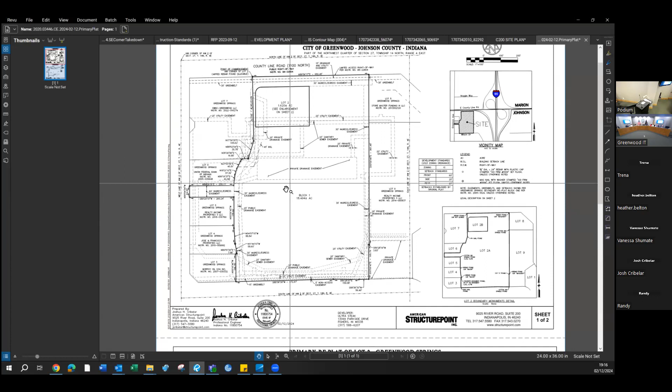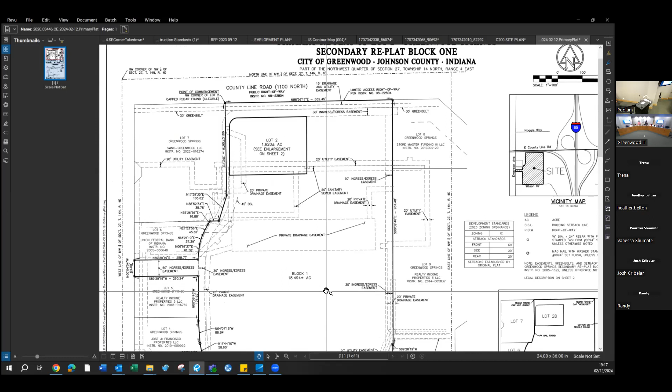On the screen in front of you, we have a primary plat to create a lot within the Walmart parking lot to allow us to construct a restaurant. Last minute, Walmart did approve us to act on one of Gabe's comments to allow the Walmart parking lot to become Block 1 and the lot we're carving out to be Lot 2, which will enable Walmart, if they so choose, to create another outlot or further subdivide their property without coming back for the primary plat process. We are creating this 1.62 acre lot for a restaurant that will have access from the ingress and egress easement, as well as Walmart's parking lot here on the southwest corner.

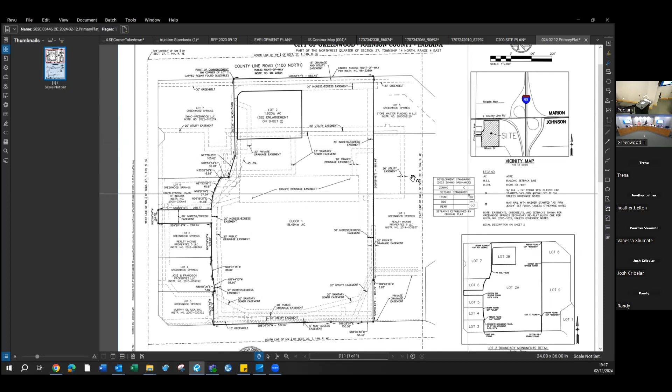Gabe, would you like me to cover the waivers now or keep that separate from here? Let's keep that separate for now and focus on the primary replat. Okay. This is zoned IC. We are meeting the ordinance for IC besides the waivers we will be seeking in the next component. This is a more zoomed in version of the primary plat just on our 1.62 acre lot that we're proposing to establish. And that's pretty much it on that.

Mr. President, is it appropriate for me to ask a question at this point? Please do. Josh, I appreciate you working with Walmart to get the approval to have a block so it can be divided into future lots and go through the replat process. Does Walmart have a number of lots they would like to divide Block 1 into, or have the option to divide Block 1 into? Currently, their intent is to never further subdivide.

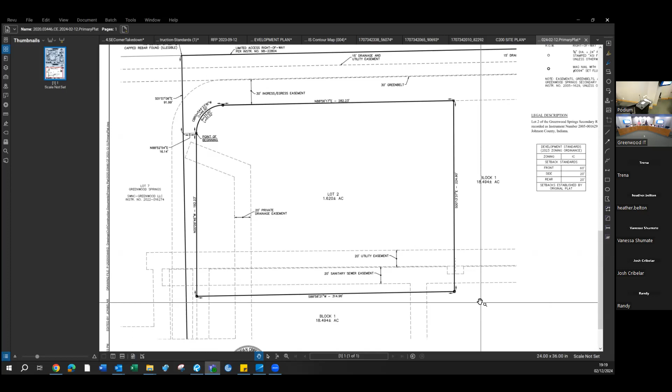I think per the current plat, they could subdivide up to 6 more lots. I don't think that will ever get to that point. I can't imagine they'd subdivide to be more than 1 or 2 more lots, just based on the frontage and size of the lot that we're contemplating currently.

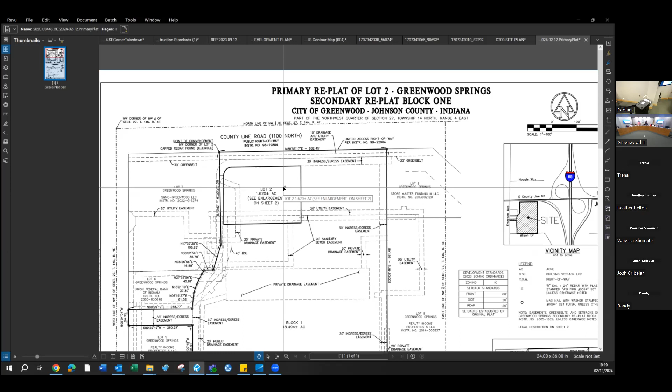Thank you, and Josh, it came in late. Do they have noted on here the number of lots that the block is allowed to be divided into? We did not add a note such as that, but that is certainly something we could add to the secondary plat document to ensure no more. I think in total there can't be more than 15 lots in this subdivision, so we can make that note. Okay, if this is approved, I would recommend that be a condition for the secondary plat. That seems agreeable.

Mr. Cribelar, is there anything else? There's nothing else on this item. Okay, then I move forward and ask if there are any remonstrators who would like to come forward and speak. Seeing none, close public hearing.

Commissioners, questions, comments? I'm curious about the increase, the traffic over there is already pretty intense, with the 3 traffic lights in a row. It's very intense. That's my Walmart, right? So what's been addressed, Gabe, with regard to all the traffic, adding more business and adding more parking?

The Walmart parking lot that exists right now is currently very overparked. They are far exceeding the number of parking spaces required. We're also working with Josh and his team to establish their own parking areas. As I understand it, Walmart will not do a formal parking agreement with them, but will allow people to park in Walmart's lot who want to go to the restaurant. So as far as the parking question, that has been looked at by staff, and we are still going to be overparked in the Walmart parking lot. As far as traffic concerns, we are working with our engineering team and with Josh to figure out the best way to design the drive aisles, and one of those will actually come up during his waiver request. We are also looking at the access points, making sure we're not creating a dangerous access on a corner or spacing those out appropriately.

It would apply to the parking as well. I think most of the traffic issues are southbound traffic trying to enter that complex, which tends to back up to County Line Road. The northbound has two options: they can come in the southern entrance, where the first southernmost stoplight is, or they can come in the second one. That doesn't seem to back up as much as the southbound traffic does.

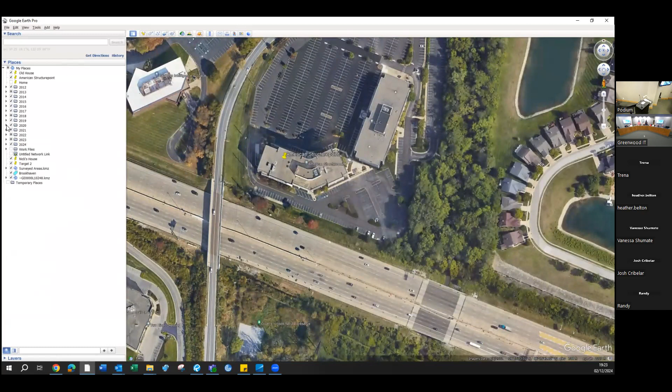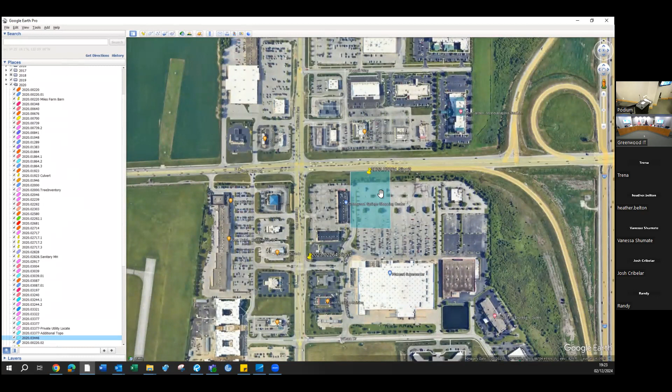The Emerson and County Line intersection, which is not our intersection, it's the Indianapolis intersection, probably operates the worst out of those three signals, and it has effects on the downstream signals, and we have no control over that. Indianapolis is currently two-laning Emerson Avenue in each direction north of County Line Road, which I think will help traffic at that signal as well.

Outside of those major roads, once you enter the complex there's a T where you go left or right, and then another T once you want to enter the Walmart. That worries me. So that's a private internal road system as well, with an access easement.

I like the fact that you're reusing asphalt paving areas and building up the urban area rather than going farther out in the county to do entertainment activities. So I like that you're using this pavement for other purposes rather than just parking, from a design standpoint.

Any other questions or comments?

What type of restaurant would it be? The title is Ultra Steakhouse. Ultra Steakhouse is the developer, Aspen Creek Grill is the restaurant. What was the name of the restaurant again? Aspen Creek. Actually, there's three restaurants - I looked it up online today. It's owned by three different kinds, not at that one location, but the corporate.

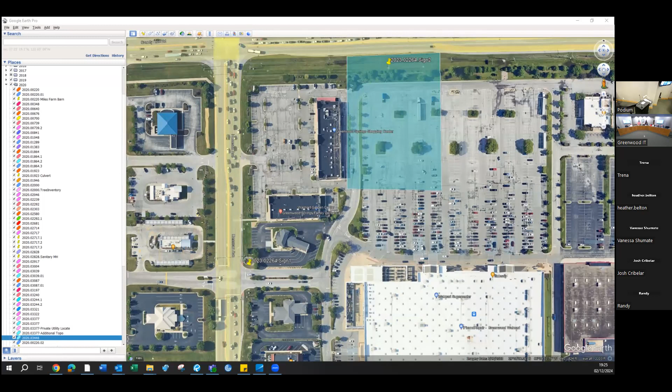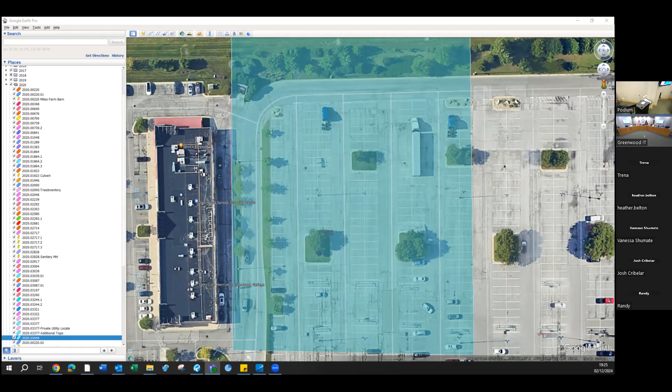Mr. President, I move to approve the proposed primary replat of Greenwood Springs Lot 2 submitted by American Structure Point Incorporated, docket PC 2023-072, subject to the technical review committee's condition that all staff comments are addressed on the primary plat, and the condition that the secondary plat will note the maximum number of lots that may be subdivided in Block One.

Once all the conditions are met, because the primary plat complies with the Unified Development Ordinance subdivision standards, and to direct the president to sign on the commission's behalf the notice of determination and written findings regarding the approval of the primary replat as prepared by the planning director.

We have a motion by Mr. King. Is there a second? Second. We'll give it to Ms. Gardner.

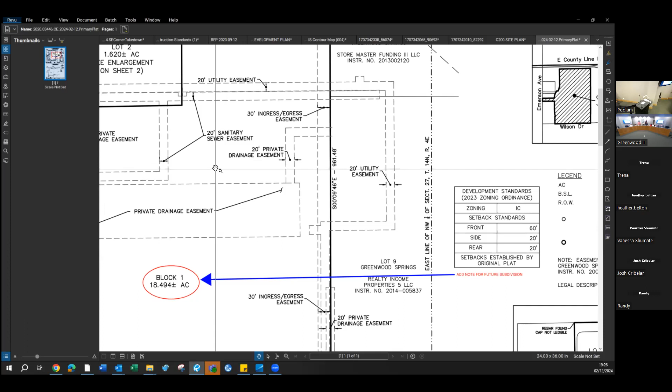That's a good sign that they're fighting over seconds. Are there any last questions or comments before we take a vote? Seeing none, all in favor please show by raising a hand. All opposed, same sign. Motion passes 8-0.

Mr. Cribelar, good luck. Thank you, thank you.

These papers, yes. Next item on the docket is PC 2023-072. This is not a public hearing, as it is a concession of three different parking and landscape waivers. We will take each of these separately. Mr. Cribelar, I assume you're presenting again?

I am, so I appreciate the good luck on the last one. Would you like me to go ahead and present now? Yes, please proceed. Okay, once again, Josh Cribelar with American Structure Point, located at 9025 River Road, Suite 200, Indianapolis, Indiana 46240.

I'm once again sharing my screen here to display the three different waivers that we are seeking. I'll go ahead and summarize all three up front. The first is a waiver from section 100603D, sufficient frontage and access to a public street.

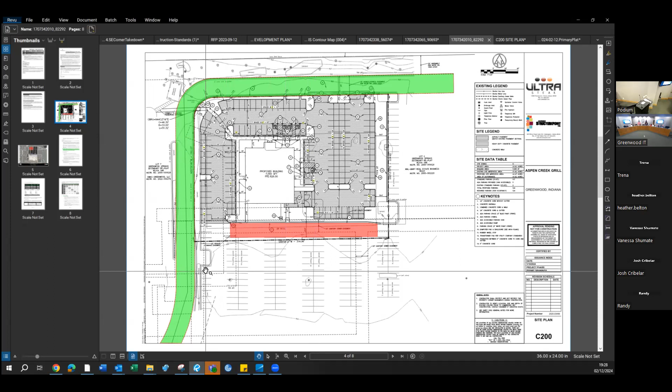As Mark had noted, we are within a subdivision with private roads within a 30-foot ingress egress easement. Therefore, we have no frontage on any public right-of-way. We are fronted on our north and west sides by this 30-foot ingress egress easement that connects out to the right-of-way and provides emergency vehicles as well as the public access to our site.

The second is section 10-03-02E, parking space dimension and drive aisles. As is typical for the UDO, parking spaces are to be 10 feet wide. We are proposing to reduce them to 9 feet wide to allow us to fully get the 124 spaces that our proposed development requires all on our site, as well as to allow us to increase our green space and get a little bit closer to hitting our lot coverage requirements.

The final waiver is section 10-03-06J2, perimeter parking lot landscaping. We have updated our plan to allow for perimeter parking lot landscaping along all of our sides of the site to the best of our abilities. However, the Walmart parking lot, as is typical of this parking lot currently, we are unable to put landscape islands at the north ends here.

And this red area is what we're reestablishing as the drive aisle for Walmart to continue the connectivity within their parking lot and not cut them off with our landscape island.

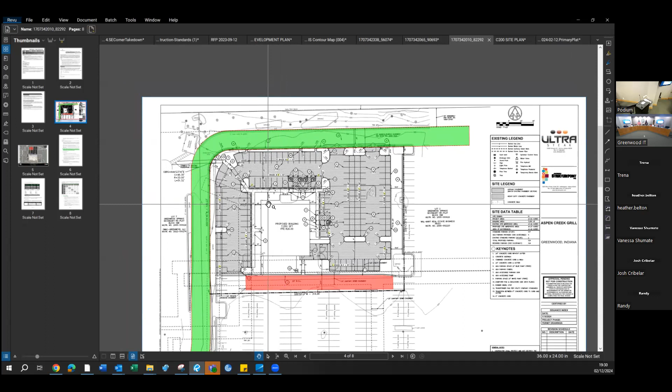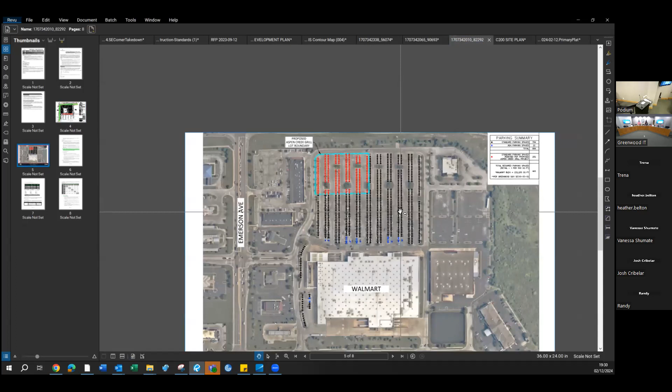And I do want to point out with this scheme for the landscape islands, I think we are making this safer in that we are removing several of the drive aisles that connect up here on the north end to the private road system, especially around this 90-degree corner that's pretty sharp. Per staff's comments, we have removed a couple connections there and pushed those all eastward to get a little bit of a standoff distance.

And then also to reiterate, we have analyzed Walmart's parking lot, that they are very overparked currently, which is good for them and also good to allow for development such as this to happen. Per their building footprint and the UDO, they only need 465 spaces. They currently have 806. So our development is removing all those red spaces, which is approximately 202 of their 806. So that leaves them with 604 spaces. Still very well overparked and maybe even allows for future development if they so choose to allow it.

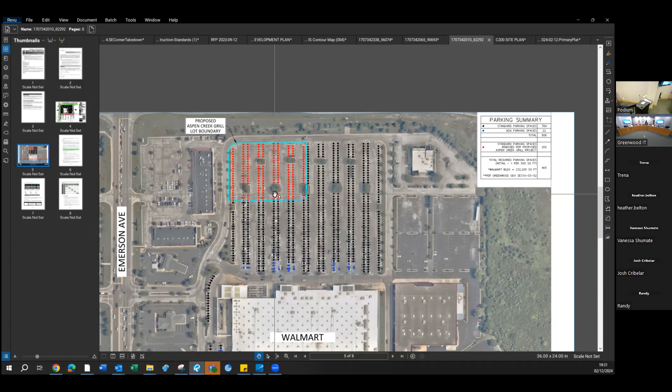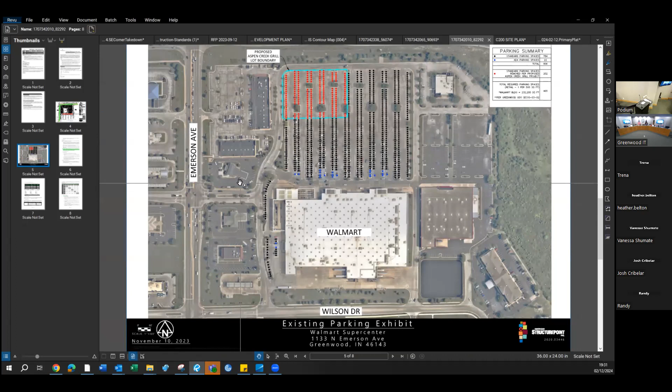And that's a summary of all 3 of the waivers that we're seeking this evening. Okay, and this is the proposed site plan just for reference. Okay, thank you very much.

Commissioners, any questions or comments for Mr. Cribelar? Other than, I guess, I saw Ken Seal, the building commissioner's concerns about the width of the parking spaces on the tech review. Yeah, I mean, I see his concerns.

Well, why don't we take these one at a time, and first address the sufficient frontage and access to public street. Are there any concerns or questions about that? Yeah, that might be cleaner. If not, I'll entertain a motion.

Mr. President, I move that the request of Alter State Incorporated for a waiver of the requirements of the Unified Development Ordinance, Greenwood Municipal Code, Chapter 10, Article 25, Division 6, subdivisions, Section 10-06-03, lots D, that specifies that every lot or parcel shall have sufficient frontage and access to a public street, to allow no street frontage on the subject property and access to Emerson Avenue and Wilson Drive through the existing 30-foot ingress egress easements along the western and northern boundaries of the proposed lot be approved, and that the Plan Commission find that the criteria set forth by Greenwood Municipal Code, Section 10-04-03K for the approval of the waiver has been met for the reasons set forth in the attachment to the written waiver request and as presented.

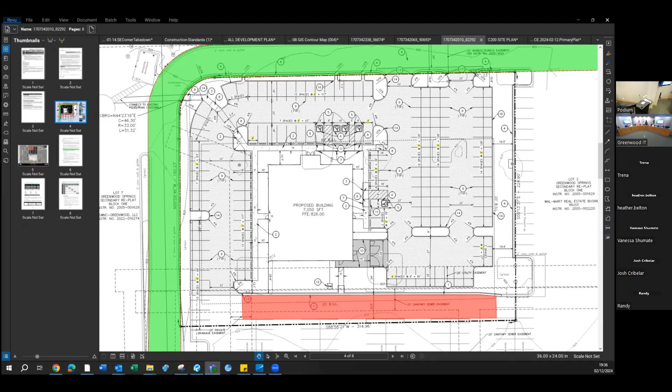Really, that's a great example to mention. Yeah, I only bring it up because I was in the tech area, just to get it out there that our well-serving building commissioner does have a large vehicle. Use the word extremely in front of that. I won't go after Ken that much.

Are there any other questions or comments? I will entertain a motion for this parking space dimension and drive aisles.

Mr. President, I move that the request of Alter State Incorporated for the waiver of the requirements of the Unified Development Ordinance, Greenwood Municipal Code, Chapter 10, Article 25, Division 3, generally applicable regulations, Section 10-3-02, parking and access, E, parking space dimensions and drive aisles, that specify 9 feet. Parking spaces must be a minimum of 10 feet width, so we're going to 9. It's saying it specifies 90-degree angles are to be a minimum of 10 feet, to allow a reduction to 9 feet.

To allow a reduction to 9 feet width for the 90-degree angle parking spaces in the proposed project, because the size of the property doesn't accommodate the required number of spaces without the width reduction, and to maximize the amount of pervious green space on the site, be approved, and that the Plan Commission find that the criteria set forth by the Greenwood Municipal Code, Section 10-4-03K, for the approval of the waiver has been met for the reasons set forth in the attachment to the written waiver request as presented.

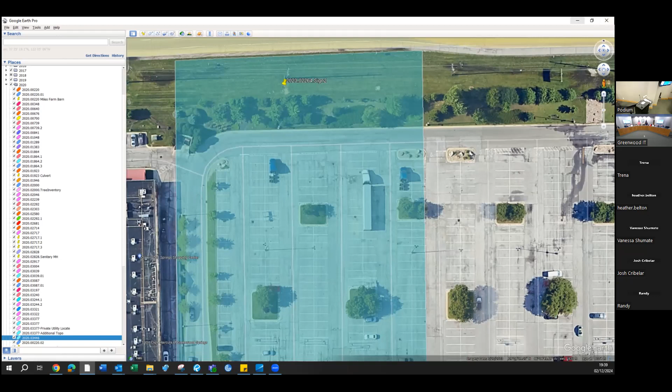If you look to the north of the red area, they have that parking lot perimeter landscaping. It's almost as if this part of the site, they are giving back to Walmart, ceding to Walmart. Visually, they own the property, but visually it would look like Walmart's parking lot to help with Walmart's traffic flow. So this is really a traffic flow concern, and that is why they're requesting the waiver.

Okay, thank you. Any other questions or comments? Seeing none, I would entertain a motion.

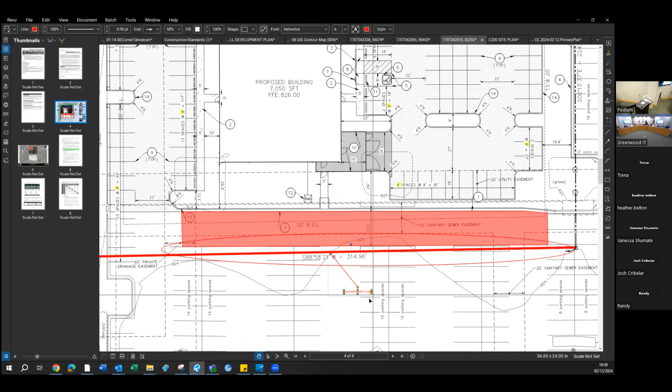Mr. President, I move the request of Alter State Incorporated for a waiver of requirements of the Unified Development Ordinance, Greenwood Municipal Code, Chapter 10, Article 25-3, generally applicable regulations, Section 10-3-06, landscaping and buffering, J, parking lot landscaping, 2, perimeter parking lot landscaping, A, B, C, and E, that specifies a minimum of 5-foot wide landscape area at the perimeter of the parking lot drive aisle, to allow striping at the end of the parking aisles rather than landscape islands, to align with the parking aisle ends throughout the adjoining parking lot where there is not consistent islands, be approved, and that the Plan Commission find that Alter State Incorporated has met the criteria set forth by the Greenwood Municipal Code, Section 10-4-3K, for the waiver and for the reasons set forth in its request for the waiver as presented.

Motion by Mr. Walker. Is there a second? Second by Mr. Probst. Any other questions or comments before we take a vote? Seeing none, all in favor, please show a sign of raising a hand. All opposed, same sign. Motion carries 8-0.